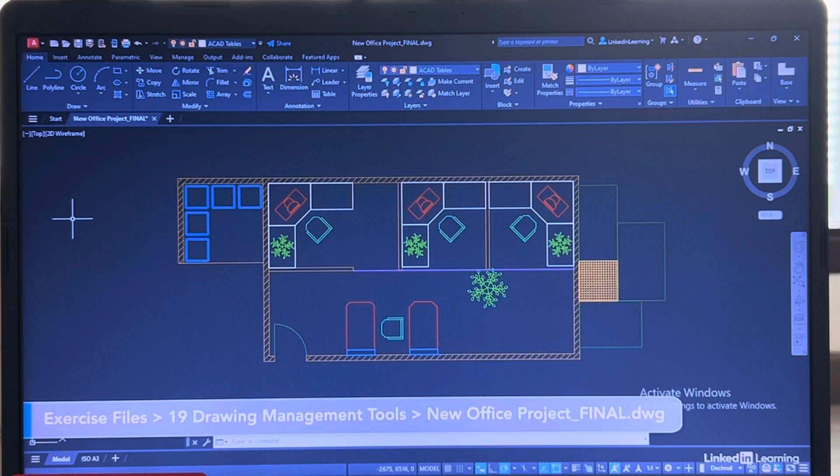We have a new drawing now called New Office Project Final.dwg, and this is the second drawing management tool I want to show you in this chapter. It's a really cool tool that allows you to count all the blocks in your AutoCAD drawing. The drawing itself is pretty simple, an office layout with various blocks in it.

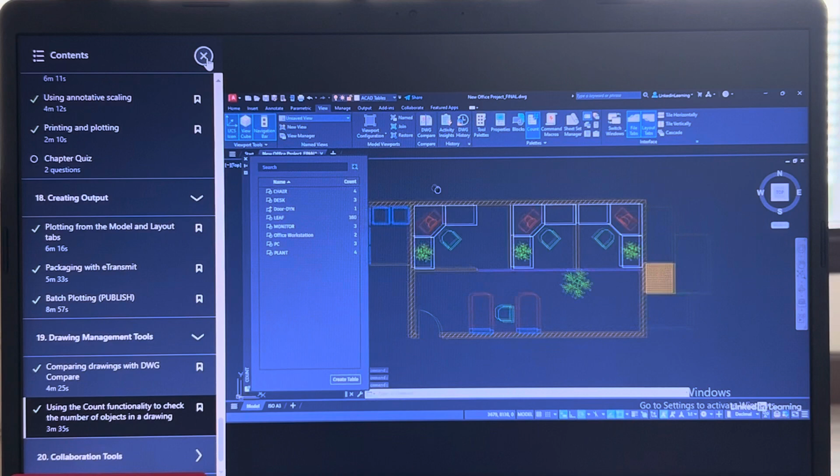If we go to the View tab on the ribbon and click on Count in the Palettes panel, that will open up the Count palette. I'm just going to pan across a little so you can see all of the new Office Project floor layout, and you can see that all of the different blocks in the drawing are numbered.

This is really useful because it lets me know how many of these blocks are in the working drawing. So I can count 4 chairs: 1, 2, 3, 4. How many desks? I've got 1, 2, 3. How many dynamic door blocks do I have? 1. How many monitors? 1, 2, 3. Office workstations, there should be 2.

I should also have 3 computers, and there they are: 1, 2, 3. You'll notice the office workstations, there's one there and one there. This one is still all original blocks, but it's still counting the PCs, desks and chairs even though they are nested blocks inside another block.

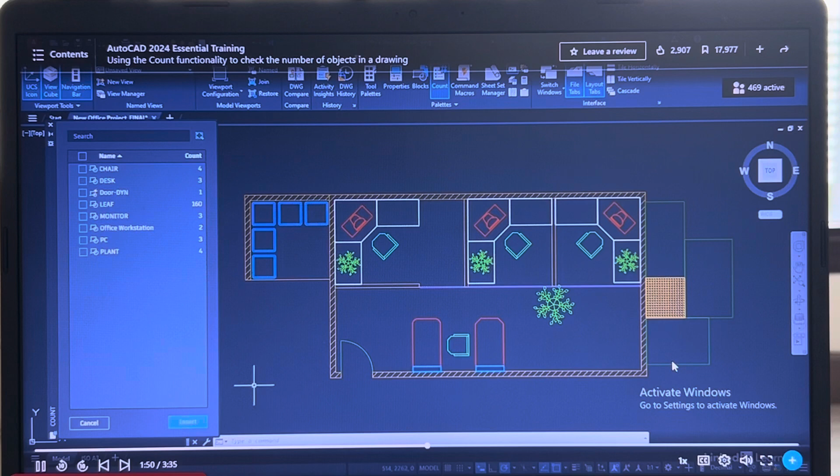So what I can do here is create a table, like so. When I click on that Create Table button, it's now asking me what I want to see on my table when counting the blocks. Ideally I need to see the number of chairs, the number of desks, the number of doors. I don't need the number of leaves.

That's the leaves on all these pot plants. Do I need to see the number of plants? I do. PCs, yes. Office workstations, yes. Monitors, not so much, because the monitors are that little bit sitting on top of the PCs. So leaves and monitors I don't need.

So I click on Insert now, and you'll see that I have a little table, and I'll just click there like so. If I zoom in on that, you'll see that it's got a count there. Let me close the Count palette for a minute. Now you'll see that these here are fields.

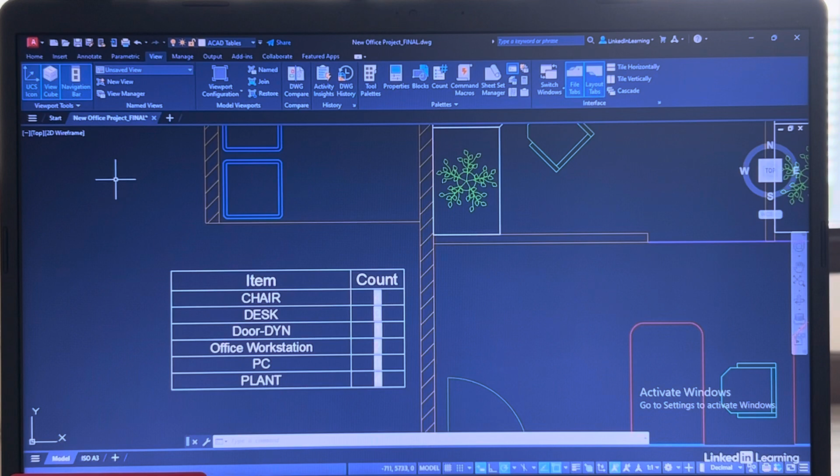So if I, for example, removed a block from the drawing, what would happen? Let's have a look. I've got a workstation there, and I've got a workstation there. Let's remove this workstation like so, by hitting the delete key.

If I zoom in on my table now and just type regen and press enter, that regenerates the drawing. Keep an eye on the Office Workstation listing in there. Can you see it updates to 1? This is a nice little intelligent table. So when I'm working on my drawing and adding or removing blocks, this table will update when I regenerate the drawing.

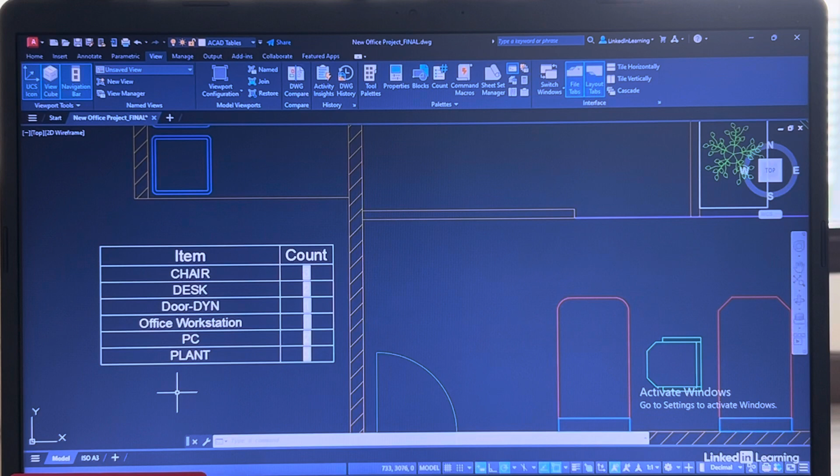If you save the drawing, it automatically regenerates as well. So you've got a tool there now where you can tabulate and count all of the blocks in your AutoCAD drawings, great for content reuse when you're reusing blocks in your AutoCAD drawings.

We're starting a new chapter now, and I'm going to take you into the collaboration tools you can use when working with AutoCAD. We're working in an environment now where we can utilize things like the cloud and various cloud-based tools to work with our drawings in AutoCAD.

AutoCAD provides you with some Autodesk-specific tools where you can work in the cloud, and also you can work with other cloud-based providers such as Microsoft, who provide OneDrive, and Google, who provide Google Drive, and there's Dropbox and Box and various other cloud-based provisions out there.

Now we've got a new drawing for you, called GF1031 Southeast Madison_cloud.dwg. So when you download it from the library and open up the drawing, you know which one it is. It's got the cloud suffix before the DWG file suffix, so you know it's the cloud-based drawing you're going to be working with.

Now, the drawing itself you'll recognize, it's the floor plan that we've been using previously. But this particular file we're going to save to the cloud in various ways.

You can use the AutoCAD web and mobile folders, but bear in mind, like I said, you can use other cloud-based providers as well. So, for example, if I went up to Save As here on the Quick Access toolbar, I can save the file on my C drive if I want to, or anywhere I want to, but I can also save it to my OneDrive folder.

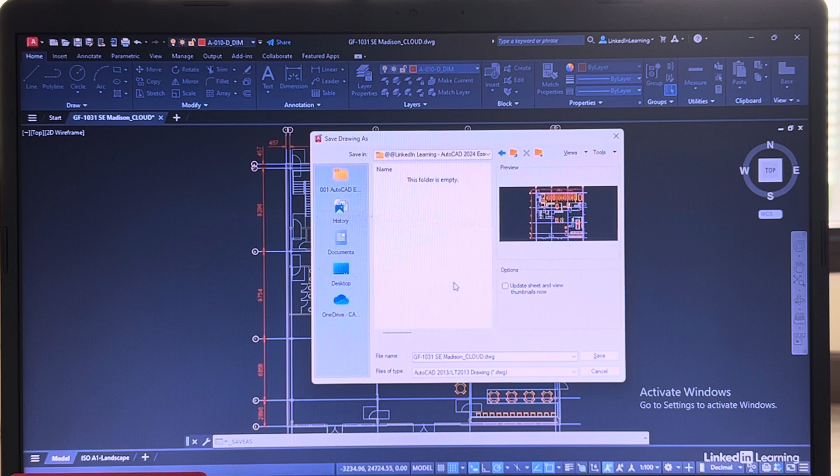So there's a LinkedIn Learning AutoCAD 2024 Essential Training folder, so I can now save that to the cloud like that. So that is now saved to the cloud. As soon as I do that, you'll see it's talking about AutoCAD Web and AutoCAD Mobile.

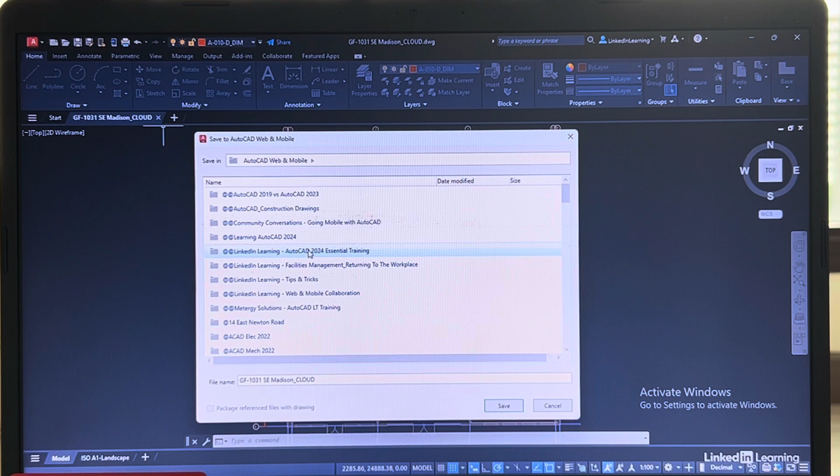If I double-click in there, I can now save this particular file, which is my GF 1031 Southeast Madison Cloud. So when I click on Save now, that file is saved in my AutoCAD Web and Mobile folders. Again, if I just click on Save up here, it gives me the file name, but that file is now in my AutoCAD Web and Mobile folders.

That means I can use AutoCAD on the web and AutoCAD on mobile to edit the drawing if I want to. We're going to cover that a little bit in this chapter in a moment.

But what I want to get across here is you're not just tied down now to your computer's hard drive, or to the server in the office. You can upload your files to the cloud, which means they are completely mobile. It also means you can work on those drawings when you're out on site or on the factory floor, utilising tools such as AutoCAD on the web and AutoCAD on mobile.

AutoCAD Mobile is great because it runs on a smartphone or a tablet, so you could be out on site with an iPad editing your drawing as long as you've got internet access, and you can also work offline and synchronise as well if you need to.

But ideally, internet access helps because you've got live, real-time access to your drawings in the cloud. I just want to get across that this technology is here now, and it will make you a lot more mobile with your AutoCAD designs.

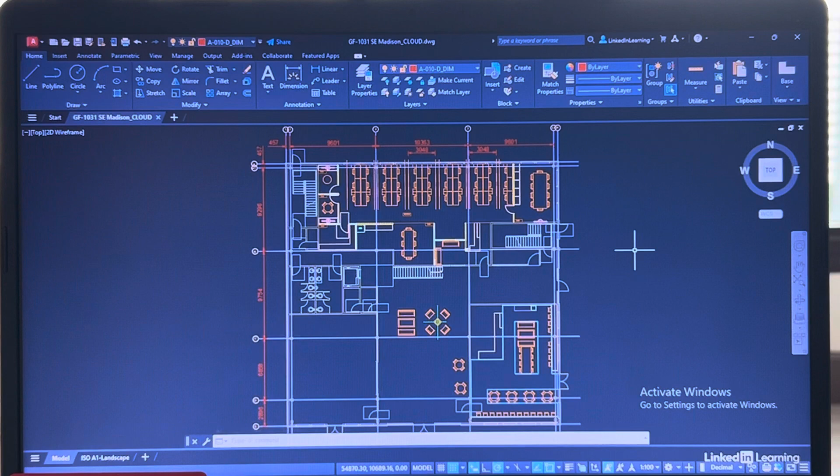So I can open that up, and that will open this particular version of the file. And what we're going to do is work with this particular version of the file through the next few videos.